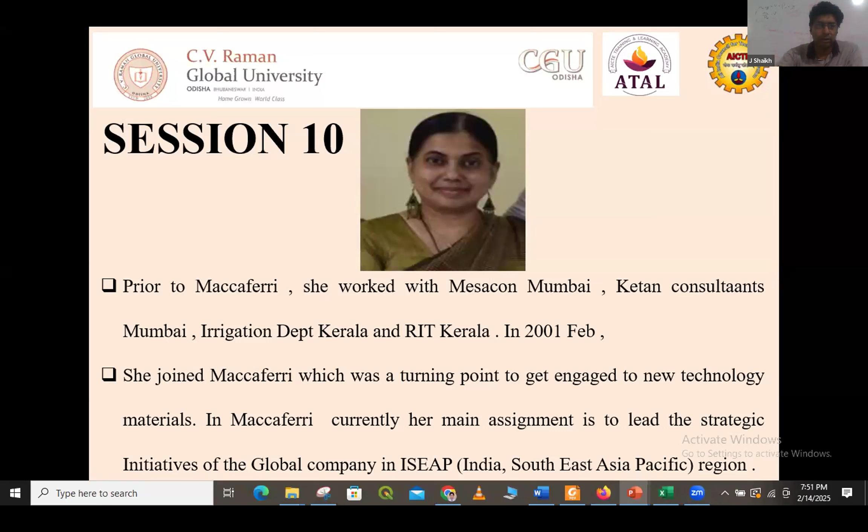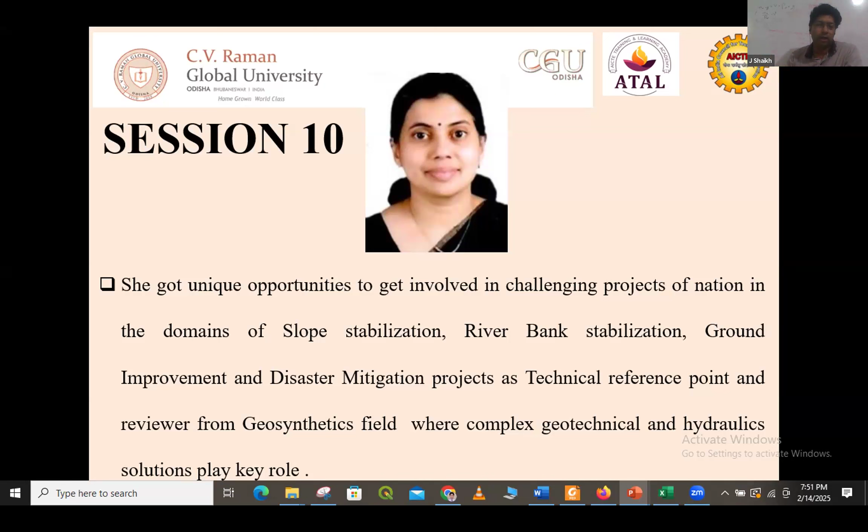She got unique opportunities to get involved in challenging national projects in domains of slope stabilization, river bank stabilization, ground improvement, and disaster mitigation projects, serving as technical reference point and reviewer in the geosynthetics field, where complex geotechnical and hydraulic solutions play a key role.

Ms. Minimol Korulla is instrumental in developing new products and engineering systems, assessing the techno-commercial benefits of such innovative systems in real application areas. Her focus is to use local materials optimally in construction, emphasizing eco-friendliness and carbon footprint reduction. She has received many national and international awards for her contribution to innovation, sustainability, and disaster mitigation. Here you can see Professor Deepankar Choudhury of IIT Mumbai presenting her with an award.

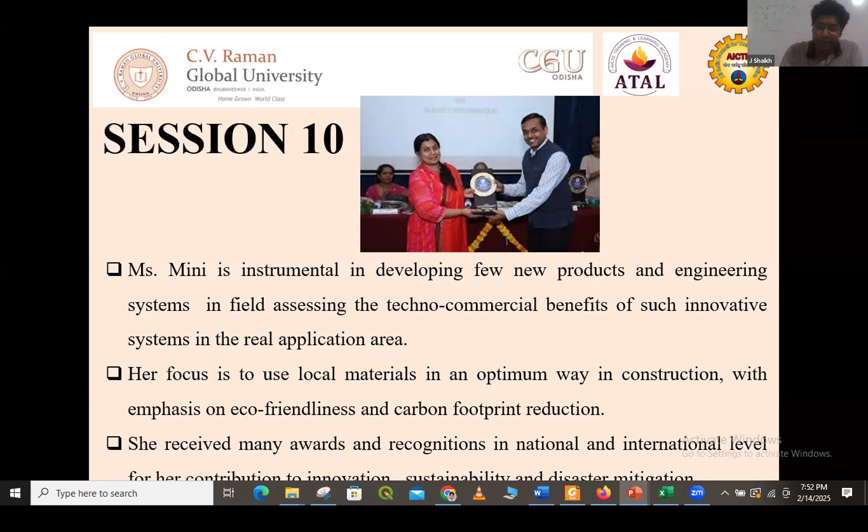Hello, ma'am, are you there? Hello, it's not visible. Thank you, am I audible? Yes, you are audible, ma'am. Can you say, which award did you get in this picture? I'm really impressed how beautifully you presented. Okay, I'm just, but I'm not finished. Oh my God.

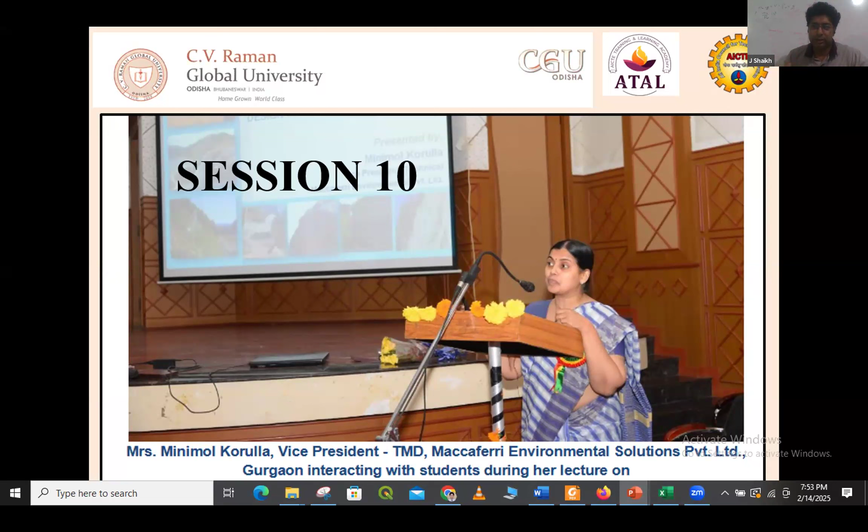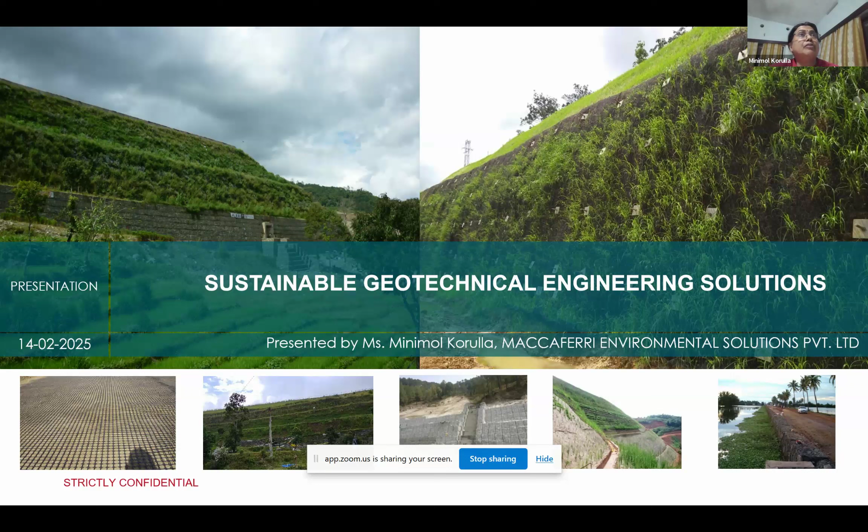The topic, sustainable geotechnical engineering solutions, is very close to my heart. This is why I have been in my present organization for a longer period compared to all other organizations I worked in. I was teaching in an engineering college, worked in the Kerala irrigation department, and worked with some structural design firms. But at Maccaferri I am spending a lot of time, one reason being the freedom to work for sustainability and eco-friendly solutions. The second reason is these platforms, where two-way learning happens, and we can think together how to make the world more sustainable and eco-friendly for our future generations.

So the flow of the presentation is: some introduction, then ground improvement. We were listening to Professor Sivakumar Babu's application of many polymeric materials in landfill, soil reinforcement, and he mentioned ground improvement also. But specifically, I want to emphasize ground improvement, how these geosynthetics and related materials can play a role in coastal roads, marshy areas, and filled up land.

Pavement applications - this is a huge application area. The last 5 years, it is really going in a very fantastic way, I will say. One reason is a code or guideline published by IRC, IRC SP 59. It is for pavement applications for cost effectiveness and durability.

Then slope stability. Slope stability is an area where definitely the geosynthetics alone may not work. It may have to combine with other types of materials also, but still it can play a big part. So here I will be introducing, apart from the geosynthetics, other geotechnical related materials like steel meshes, steel ropes, energy absorption panels, and bioengineering materials like coir, jute, and mixed type of products.

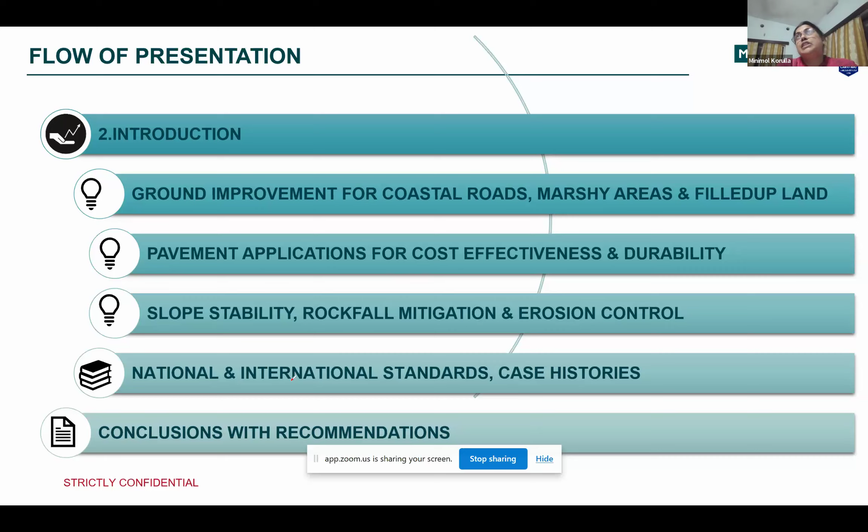And apart from the Bureau of Indian Standards and the IRC, we are following a number of ISO standards. India is a participating member of some of the ISO committees, and those guidelines which we can use without any inhibition - I just want to give a glimpse on that, and some recommendations for general civil engineers.

I'm sure that as the topic of this series of sessions is sustainability, this must have already been discussed. But the question is, when we are doing day-to-day design, are we considering the conditions of today or future? So definitely it should be future.

In some branches of civil engineering, few branches, we always go for predicted volumes, maybe in hydraulics, maybe in highways, but not everywhere. And we are not really thinking about the decaying of environment and the increase of population, the increase of waste volume, and recently everyone is talking about climate change. Even a fifth standard student will talk about that. But are we using it when we are going into our regular designs? And what is going to be the condition - whether it will be better than today or worse?

It may be that in first class cities, the main areas maybe near the capital city, may be good and clean, but we know that many parts of even our main cities are not in good shape, and it is getting deteriorated. I was in Delhi for so many years, and definitely it was a big concern whenever we were traveling to see how the atmosphere is getting polluted, how the water is getting polluted, how the land is getting polluted.

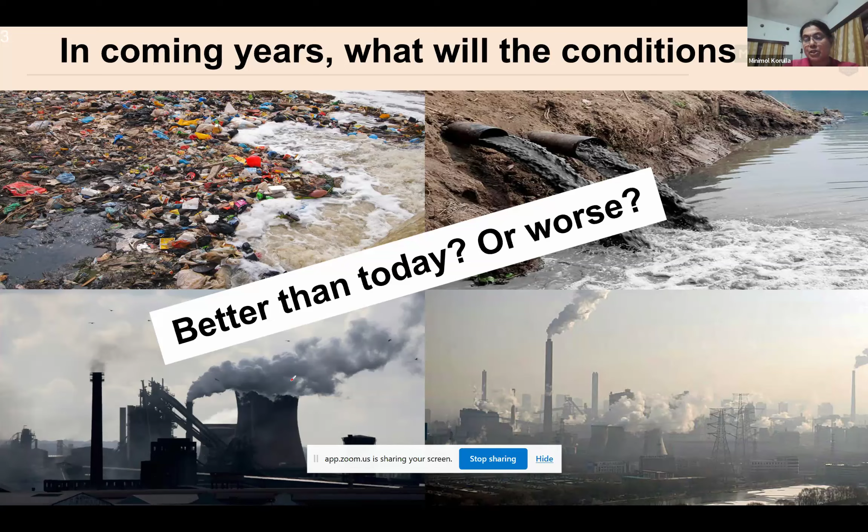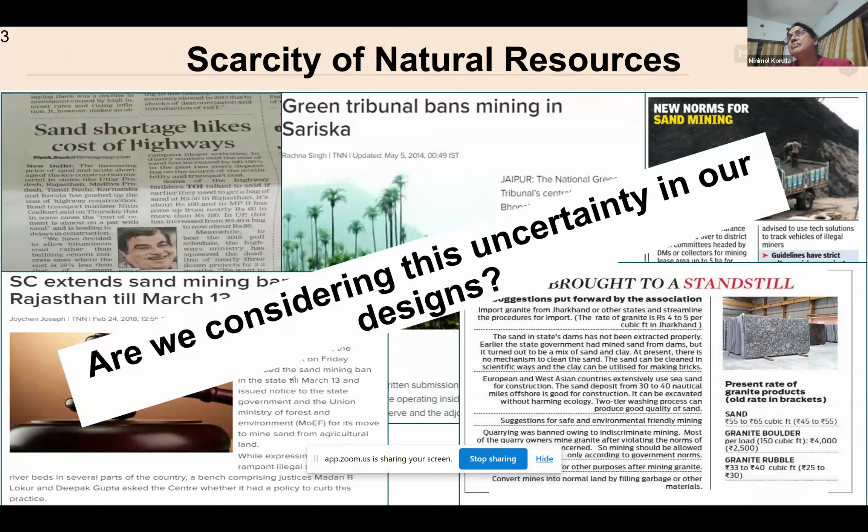And the next issue is the scarcity of natural resources. In many states in India nowadays, our design guidelines tell us we have to use frictional free draining sand, with the classic assumptions: cohesion equal to 0, angle of internal friction equal to 30 degrees or more. But that is not now available in many parts of India. In many states, sand mining is completely banned.

But are we preparing our next generation for what material they are going to construct with, using the same books, same syllabus, with only small modifications? Are we making them prepared? Especially in a country like India, where we cannot jump to something so fast because of the economic diversity, the mixture of culture, and the developed stage. So this is a very big topic, and I don't think my humble session can cover even a part of it.

But still, where I want to touch on: one is the frequent natural disasters — earthquakes, landslides, tsunamis, floods. Every year we are hearing some very bad calamity happening in some part of India. So I am from Kerala. Last year, July 30th, a very big landslide happened in Wayanad, a part of Kerala.

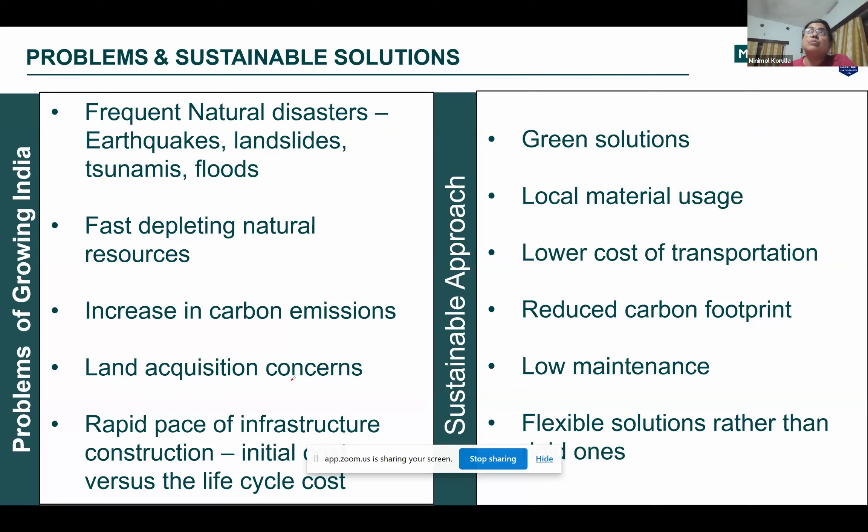And as far as possible, go for flexible solutions. Why flexible solutions? Especially in a place where a lot of disasters can happen, instead of rigid solutions, flexible solutions can accommodate a lot of movement. Using flexible solutions, in many places we can reduce the requirement of reinforcement, ground improvement, and too much excavation — we will be able to minimize it.

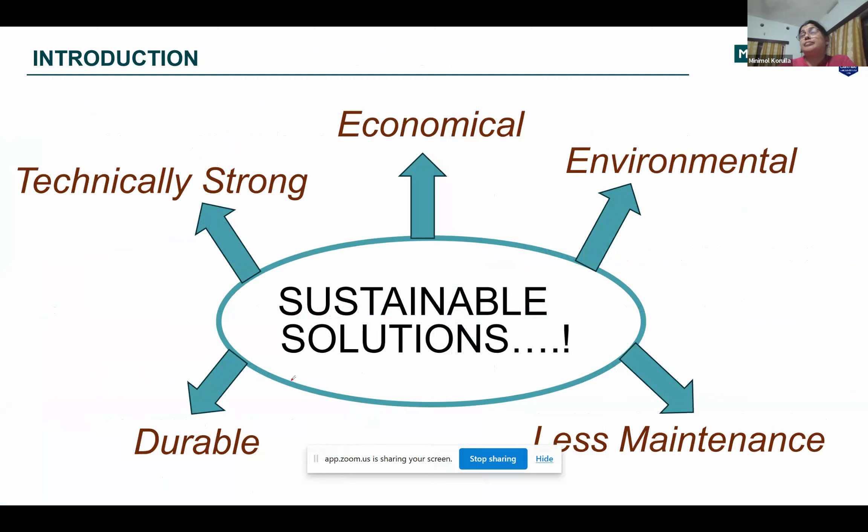So when we talk about sustainable solutions, it's not just about green solutions. It should be technically strong. It should be economical — definitely very important, then only it will get repeated. It should be environmental friendly. It should have less maintenance, and finally it should be durable.

So talking about different application areas, as a continuation of Dr. Babu's presentation, about flexible type materials — one major family is the polymeric family, with a lot of family members. Initially it was mainly geomembrane and geotextile; 20 to 25 years before in India, those were the main materials we were talking about.

But now they brought all their other relatives also, cousins, aunties, uncles, grandchildren, everyone has come to India. A geosynthetic baby is getting born every day in some part of the globe because the use is increasing, and more manufacturers are entering the field, making differentiated products to create new brands.

If you classify the major applications for polymeric materials or other flexible materials, like bioengineering materials such as coir or jute, or rockfall protection meshes or rockfall barriers, basically these cover ground improvement, pavement stabilization, subgrade stabilization, slope protection and slope stabilization, simple to complex erosion control measures, rockfall mitigation measures, and drainage solutions. In each of these applications, a number of product families exist.

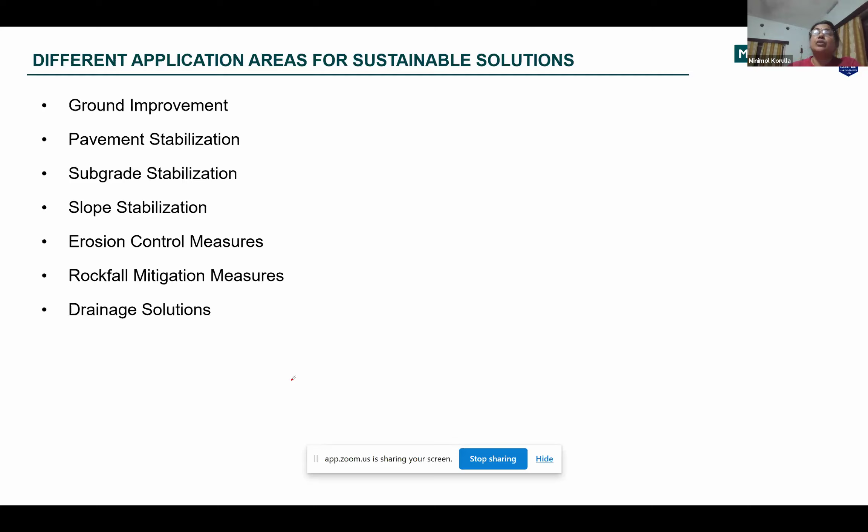And these are covered in our Indian guidelines also. So definitely this type of alternate technology, as well as the system and its specifications, should be part of the academic curriculum also.

Now starting with ground improvement - coastal roads, marshy areas, and filled up land. I've seen Dr. Babu has already covered the PVDs, as well as other ground improvement methods. So I'm basically talking about basal reinforcement, where geogrid can be used as a shallow ground improvement method, and it can be combined with PVDs wherever clay is the main foundation material, or it can be combined with stone columns also.

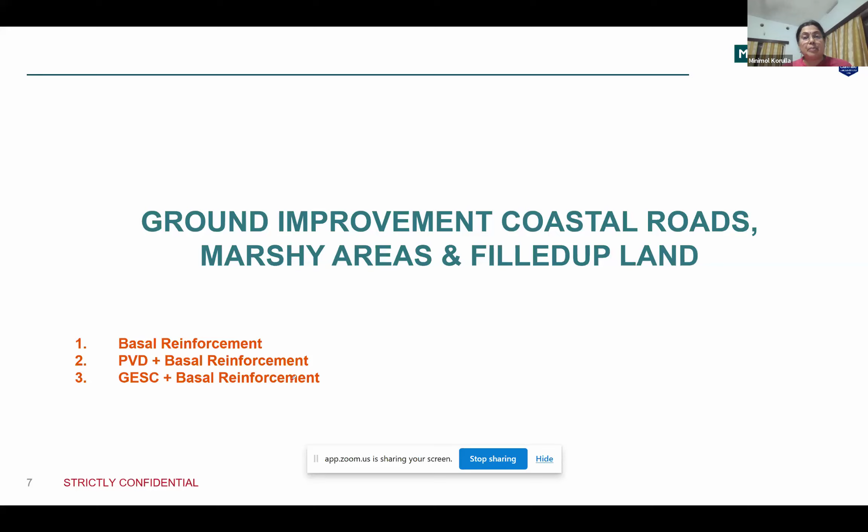So basal reinforcement, basal reinforcement plus PVD, basal reinforcement plus stone column - not simple stone column, but geosynthetic encased stone column. These are the three points I want to cover in the next few slides.

So basal reinforcement - I will say this is a very wonderful material where the geogrid can be used like a raft in structural engineering when giving the foundation. The objective of giving a raft is to control or stop the differential settlement.

Why? Because in the raft, there will be a complete redistribution we are assuming, and we design the structure like that. So if we use a geosynthetic - not any geosynthetic, but one with reasonably good tensile strength, and more importantly, high stiffness - then it can act like a raft, so that whatever load is coming gets redistributed, and the settlements, especially the differential settlements, get regulated.

If we have to really understand how the inclusion of this geogrid will modify the behavior, we may have to do a numerical analysis. But even with normal calculations for bearing capacity, we can take advantage of using a geosynthetic.

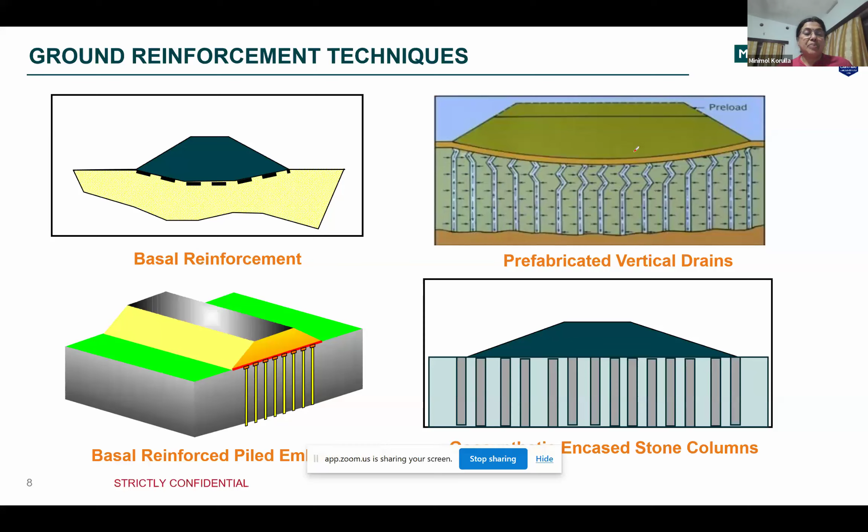So we can go for PVDs, prefabricated vertical drains, which will accelerate the consolidation. PVD can also be called a geocomposite. The PVD will accelerate consolidation by reducing the drainage path, and the basal reinforcement will help uniform distribution of forces and control differential settlement. The same can be combined with piled embankments as well as with geosynthetic encased stone columns.

So prefabricated vertical drains, basically when we are using the PVD, how much time can we wait? That is until the end of consolidation. Maybe it's only 45 days we can wait, or maybe something like 6 months we can wait. So that will decide the PVD spacing as well as the diameter of the PVD.

But how much height we can construct in one stretch will depend on the shear strength of the soil. But when we are putting a basal reinforcement, at a stretch we can go for more block heights for the embankment construction.

So someone who is executing the structures or the work in the field can understand how significant it is when we are allowing a stage construction with permission to go for higher block heights. That will be a big advantage, a big cost reduction for the constructor, the contractor, or the end client.

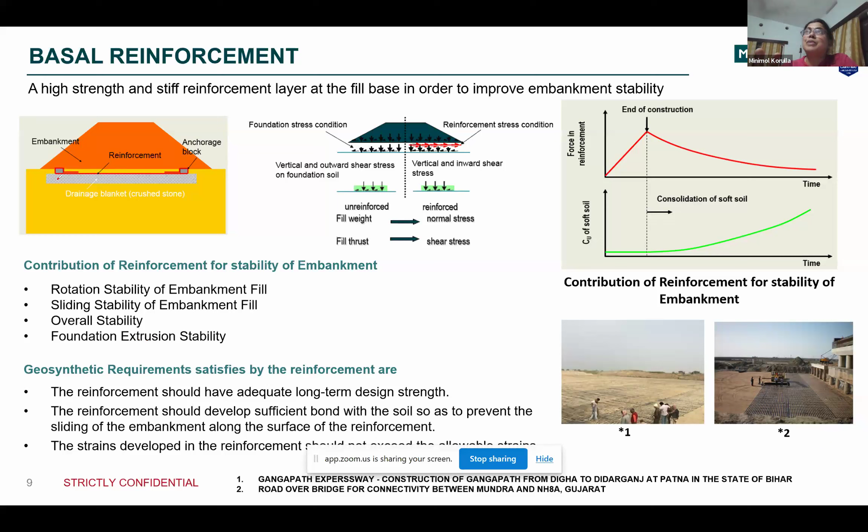So definitely I cannot cover all these failure mechanisms. If you are interested, one can go to IRC 113. It is a very thin book, and it talks in a very simple way. Somebody who knows earth pressure theories will understand the equations, and even worked out examples and a number of case studies are explained in this particular code.

Now about the PVD. As I told you, PVD itself is a geocomposite. It will be a combination of a filter jacket and a core. The filter jacket is made of geotextile or geofabric, and the core is made of a stiff material. What is the function of the filter jacket? The function of the filter jacket is the same as any filter: it will prevent soil particles from entering the core, and it will allow the movement of water.

Whereas what is the function of the core? First of all, the core will support the filter jacket because it is a fabric. If you are putting it in soil, for it to stand, support is required. So this core supports the filter jacket. Second, it provides the internal flow of water along the drain. And finally, it provides resistance to the longitudinal stretching as well as the buckling of the drain.

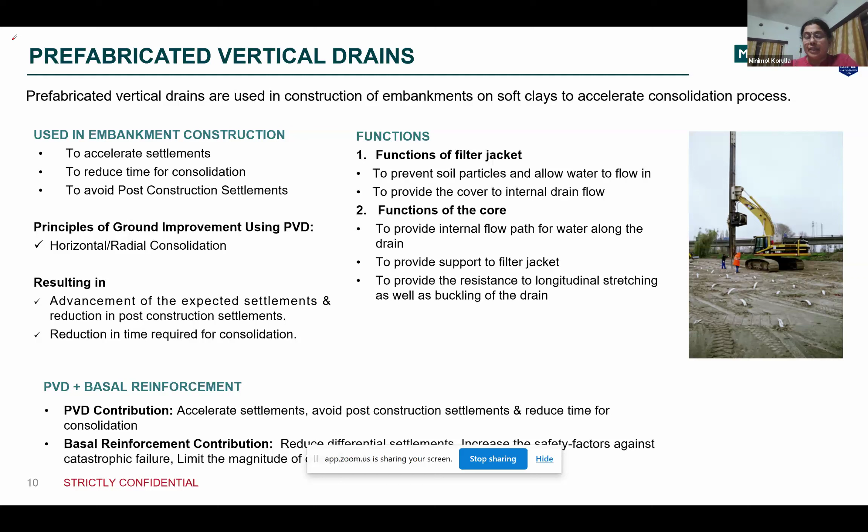So this is a project which I was part of the design team for, and even during the implementation time, the project was monitored as part of the expert committee. So I know the project well.

But overall, all these clays have very poor bearing capacity, and additionally the settlement characteristics are really very dominant. If we directly place an embankment of height, say 8 to 10 meters, on this type of clay, it will settle like 1.5 to 2 meters.

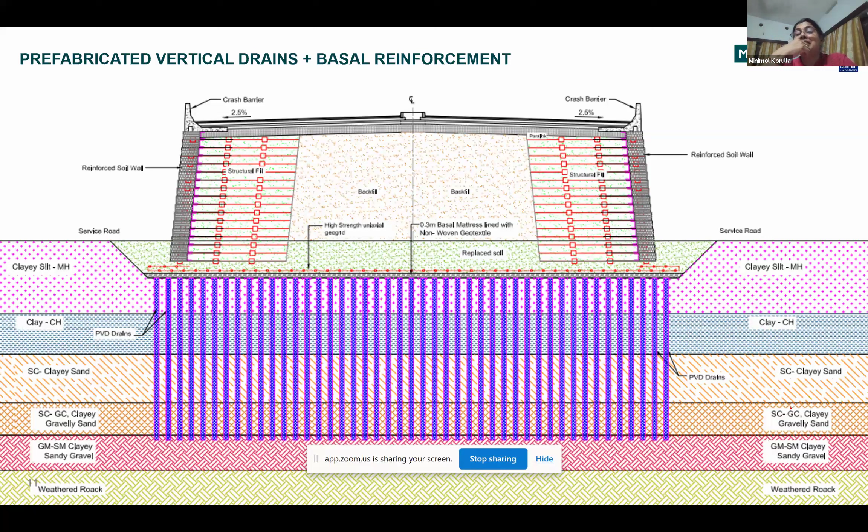And especially the cross section we are seeing here is for a bridge approach. So if we allow 1 to 1.5 meter settlement, you can imagine that to reach the bridge we may have to provide some sort of ladder, right? And for the vehicles there will be a lot of problem.

So for this project there were two suggestions. One was with PVD and basal reinforcement, and the other suggestion was with stone columns, not regular stone columns but, as I mentioned earlier, geosynthetic encased stone columns.

I'm sure at least a few of the participants must have heard and maybe have some familiarity with the geosynthetic encased stone column. So what is it? As I mentioned, in this particular area the clay was very poor - its phi value was almost zero and C value was only 10 to 15 kPa.

So in such a place, if we drive a stone column, what will happen? The clay will slowly infiltrate into the stone mass, and finally the behavior will be like clay only. But if you put a filtering geotextile, then that can act as a deterrent for the clay particles to deteriorate the soil mass. That is the function of the geosynthetic encasement.

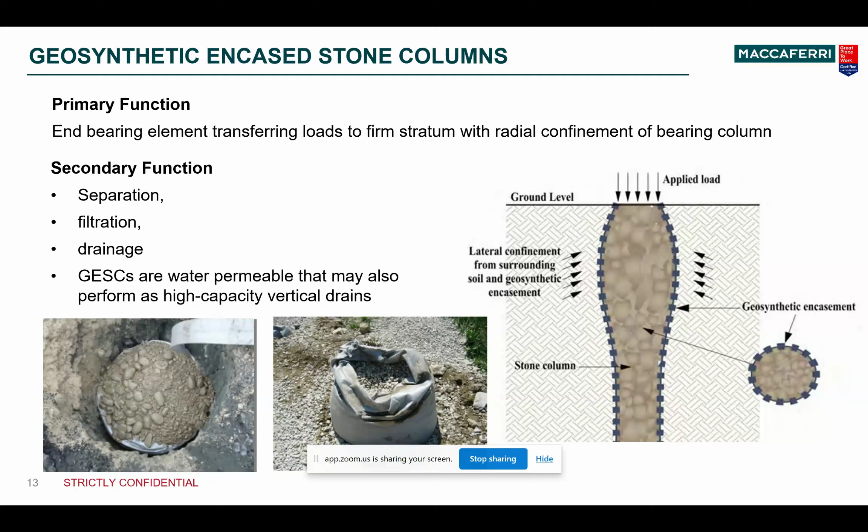So on the same stretch, in some areas, as I told you, it was PVD plus basal reinforcement, but in some stretches PVD alone would not work, and in those areas stone column and basal reinforcement combination were used.

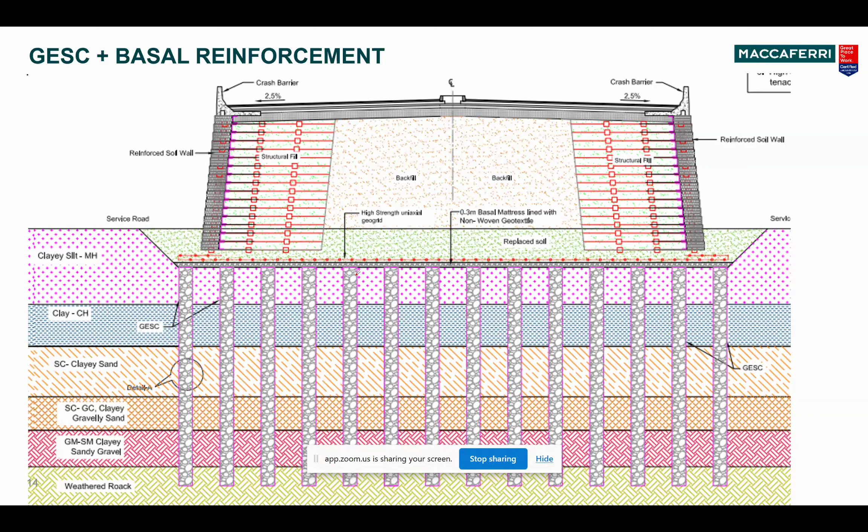But in both cases, basal reinforcement played a big part, because if basal reinforcement was not used, the overall cost of that some 20 kilometer stretch just for ground improvement would have gone to something like 200 crore. But with the introduction of basal reinforcement, that came down to between 25 crore to 40 crore. I don't know the exact final figure.

When the solution and installation methodology was finalized, it was 25 crore. But later the contractor told me that some increase happened because of delays and so on, so I guess it may be another 30%. But he also admitted to me that overall the initial 200 crore got reduced to 40 crore.

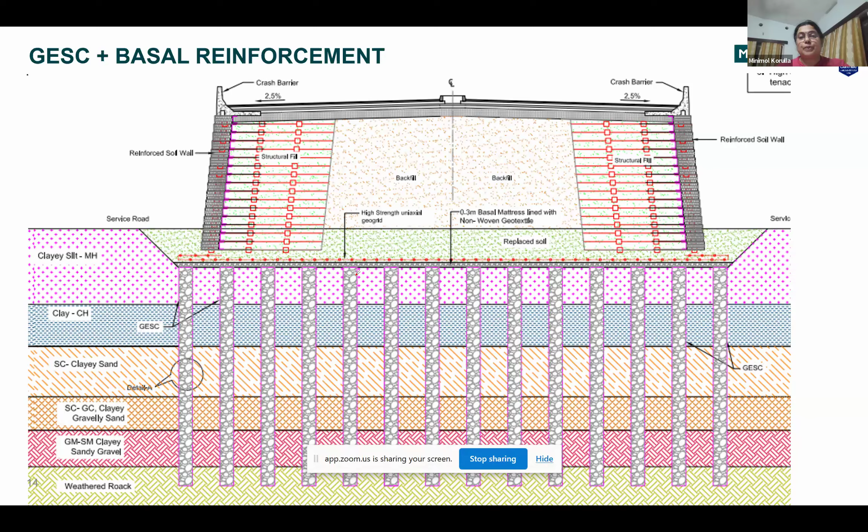Now let me touch on the pavement applications. The first is the geotextile, especially when we are constructing a road embankment over very poor soil. If we keep a separator layer or a filter layer, then the contaminated area will not damage the pavement layers.

Second is the geogrid. I was talking about the basal reinforcement, and I said it should have good strength, good tensile strength, and good stiffness. So you may ask what is the range? When I talk about good tensile strength, I mean something more than 100 kilonewton per meter, and stiffness more than 1000 kilonewton per meter.

But in pavement, we don't require those types of geogrids which have more than 100 and all - we can go for even 40 kilonewton per meter or 25 kilonewton per meter. But these types of geogrids should possess some specific qualities so that the pavement layers will be stable under traffic load.

Because pavement layers are very near to the wheel loads, and under the wheel loads, the base component or sub-base component should not slip off. So the geogrid should act as something which increases the stability. Usually extruded geogrids are used for this purpose.

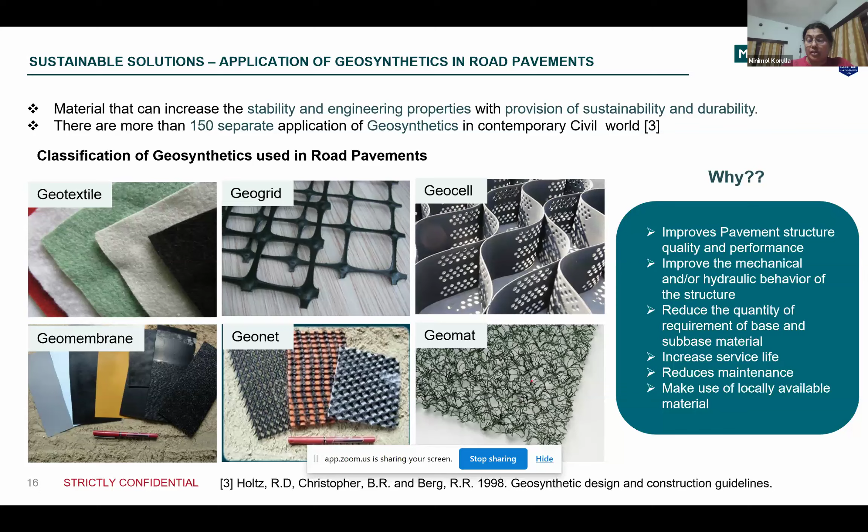So for pavements, as I mentioned, there are different families of geogrids: knitted geogrids, woven geogrids, bonded geogrids. Among them, extruded geogrids are considered one of the best for pavement stabilization.

Usually extruded geogrid, biaxial geogrid, or even multi-axial geogrids can be used. But in India at the moment, the biaxial geogrid is the most popular. Its basic polymeric material is polypropylene, and it exhibits high modulus and high tensile strength. One more important terminology in pavement application is junction strength and junction efficiency. That is also very good for extruded geogrids, and hence extruded geogrids are the best for pavement applications.

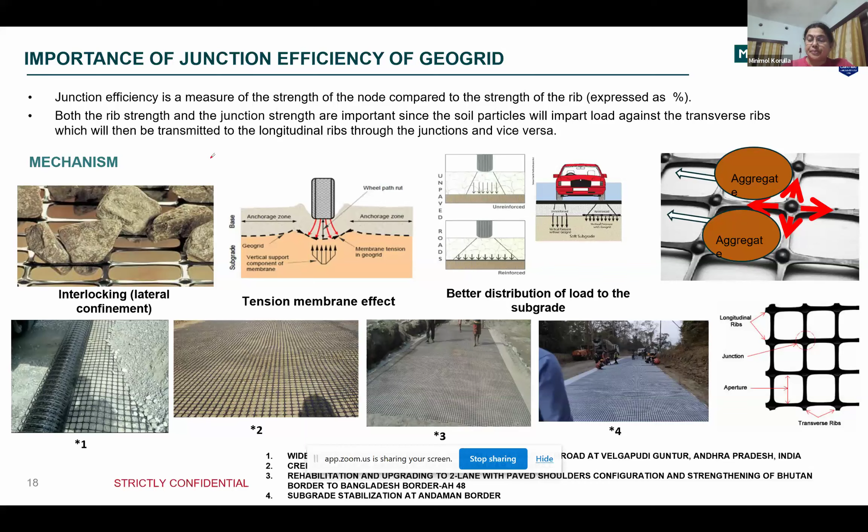So, apart from base reinforcement or sub-base reinforcement, even bituminous layers can be reinforced, or the application of geosynthetics can increase its quality. Like paving fabric, it's a geotextile which can be used in asphaltic layers. It can act as a good moisture barrier layer, helping prevent water intrusion and hence pavement deterioration.

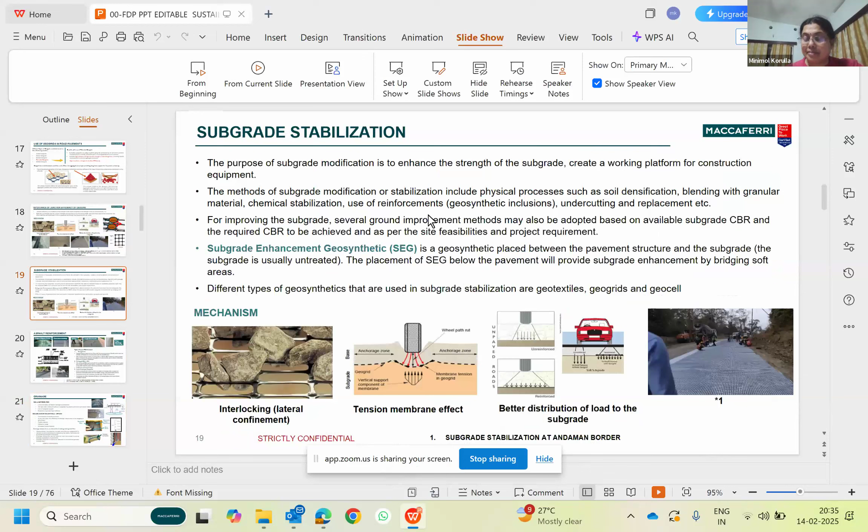So I was talking about extruded geogrids for pavement stabilization and reinforcement. The extruded geogrid is the best because of its efficiency, junction efficiency. Under wheel loads, it will not allow the aggregates to move, and it will control and absorb the strains. Because of this, the maintenance time in a pavement increases drastically.

For example, if a 20-year design period is given to a designer for a pavement, usually he will define maintenance after every 4 years, especially for state highways or major district roads. He'll say every 4 years I need maintenance. But someone designing with geosynthetics can really tell, if he has real experience, that for 20 years he doesn't require any maintenance. Someone conservative will say maintenance may be required after 9 years, meaning only in the 10th year.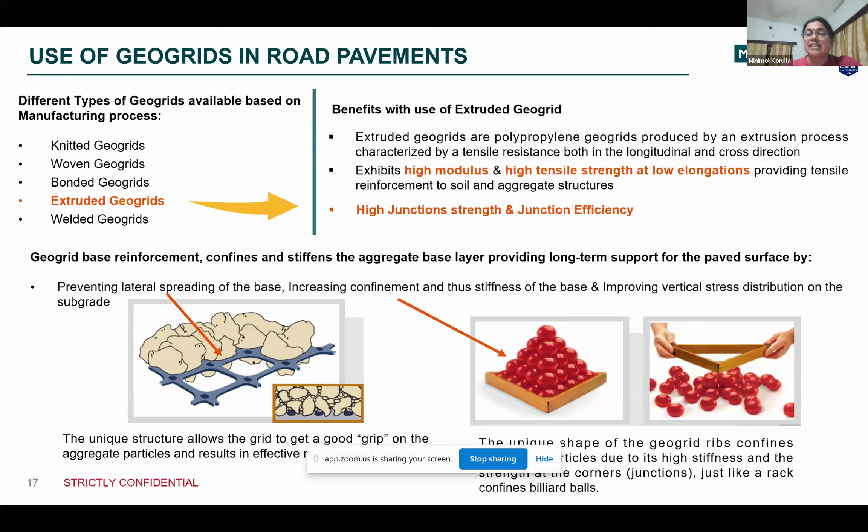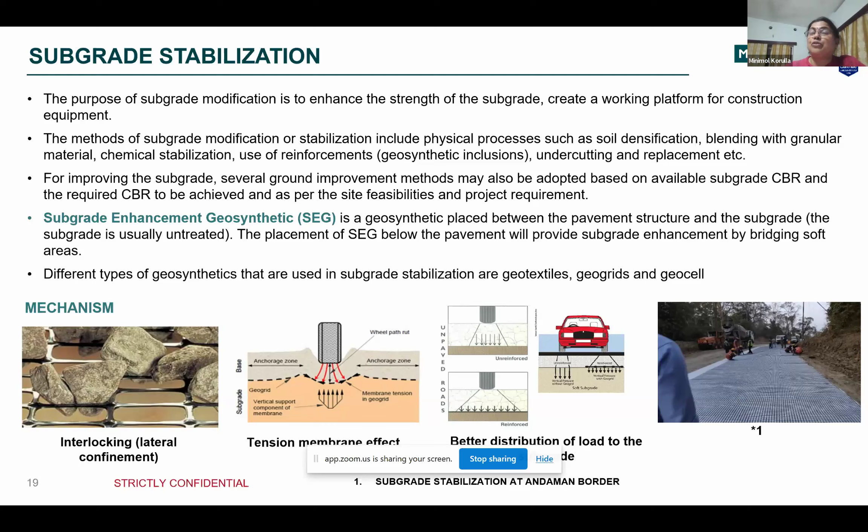I won't be able to explain everything, but definitely I will recommend, for somebody who wants to know more about the application of geosynthetics in pavement layers, IRC SP59, and IRC 113 for basal reinforcement. For both these codes, if you have any doubt, you can ask me, because I was the subgroup chairperson for both these codes for the authoring subgroup.

So now, apart from base reinforcement, even the asphaltic layers - because base and sub-base are basically aggregates - but what is the most expensive material in a bituminous pavement? The asphaltic layers, right? So even the asphaltic layer thickness can be reduced and durability increased if we select the appropriate geosynthetics.

Paving fabric is a textile material, a non-woven textile material, which can act as moisture retention and provide separator property to the asphaltic layers. And paving grid, or glass grid, made of glass fibers, can increase the strength of the asphaltic layers and act as an overall stiffening layer.

Then there is the composite, AIC - asphalt interlayer composite. It is a combination of glass grid plus paving fabric. So you can assume what the function will be - it will do the combined function. It will increase the strength, and at the same time act as a moisture retention composite also.

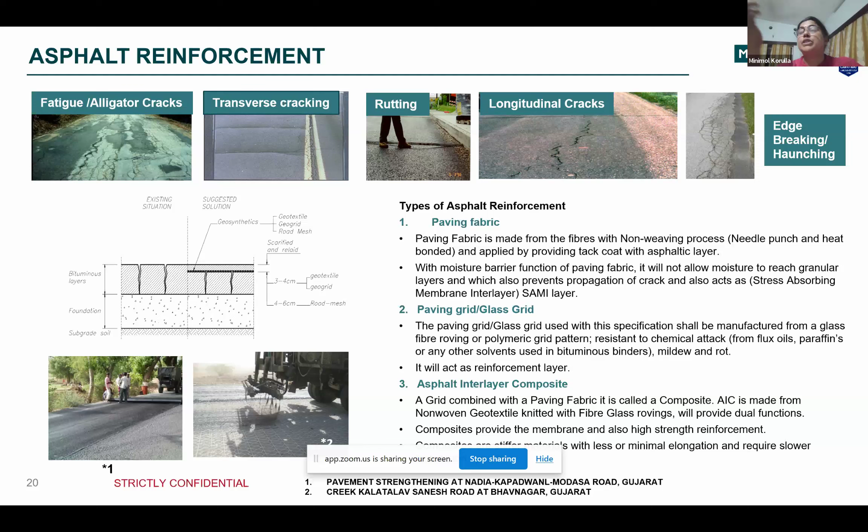Now, one more family member that gives a lot of value to the sustainability concept is drainage composite. I remember when I used to go to CRRI, maybe 10 years before, they used to hear about drainage composite, because I used to explain how it can replace 600 gravel thickness. Usually, behind a retaining wall, we have to give gravel filter, gravel drain, 60 centimeters.

Which requires a big space and a lot of aggregates. But as the alternative, I'm talking about a polymer composite. 10 years before, it had to be imported from Brazil or Malaysia or other countries. So after hearing me, my friends in CRRI used to say, okay fine madam, very good, it's all good, but it's good for academic purposes. We will go with natural aggregates, since they are still available and cheaper in India.

But in the last 5 years the situation has completely changed. This is a very hot product because the cost of aggregates has shot up. Good aggregates we are not getting. So even if the contractor brings aggregate, once we do the quality test, if it doesn't have the quality, it has to be rejected.

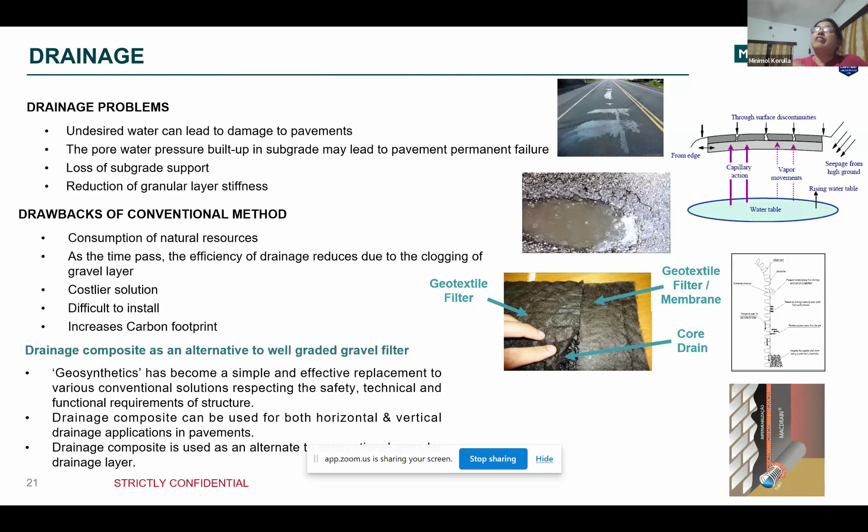Erosion control can be done best by bringing vegetation. But whether vegetation can come in every slope is the question. Vegetation may not come in every slope, especially when the slope angle is more than say 60 degrees. Up to that, in some parts of India it is easy, like the northeastern states, Arunachal, Assam, maybe in Karnataka, Konkan area, Kerala - these places it can come easily. But in many other states, it may not be easy.

But even in some of the Himalayan states where a lot of greenery is there, for example Himachal Pradesh, we were doing a national highway project. It was seen that the slopes had to be made near 60 degrees. It's a good soil with cohesion and friction, so it can stand at 60 degrees. But the way we expected, the vegetation didn't come.

So then the question arose: what can be done? We civil engineers thought bringing vegetation is so easy - if you are especially in a place where rainfall is quite strong, it will be easy. That was our concept. But we learned that the soil's agronomical factors have to be checked, especially the pH, acidity, alkalinity, as well as different elements like sodium, potassium - whatever it is, it should have the correct proportion. Then only will a slope make vegetation come easily and fast. And especially when cutting a slope in a steeper way, this requirement becomes more stringent.

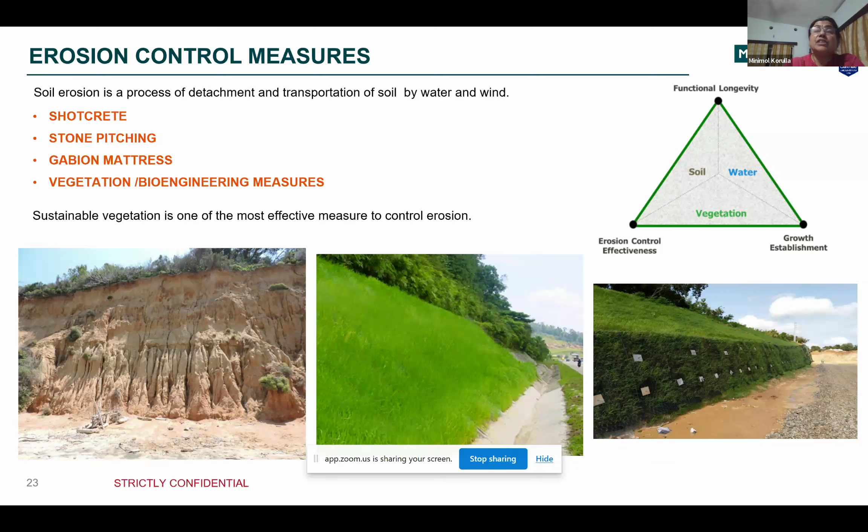So then how can we take the help of geotextile materials? Whenever the slope is less than 45 degrees, we can go with coir or jute itself. But when the slope is between 45 to 55, we may have to go with some material having mats with some tensile strength. And if it is more than 55 to 65, the tensile strength may have to be more than 10. And if it is more than 65, maybe with some cohesion the slope may be standing. But if the erosion needs to be stopped, the erosion control mat itself has to have a strength of more than 35 kilonewton per meter.

And then it should have a component which facilitates the growth of vegetation. Finally, the installation should be contractor friendly, otherwise the contractor is not going to adopt it. For that, drapability has to be good. Like coir and jute - especially for jute, the drapability is very good, whereas its tensile strength is not so good. So in many cases, we can combine bioengineering materials like coir and jute plus the polymeric material which has the tensile strength also.

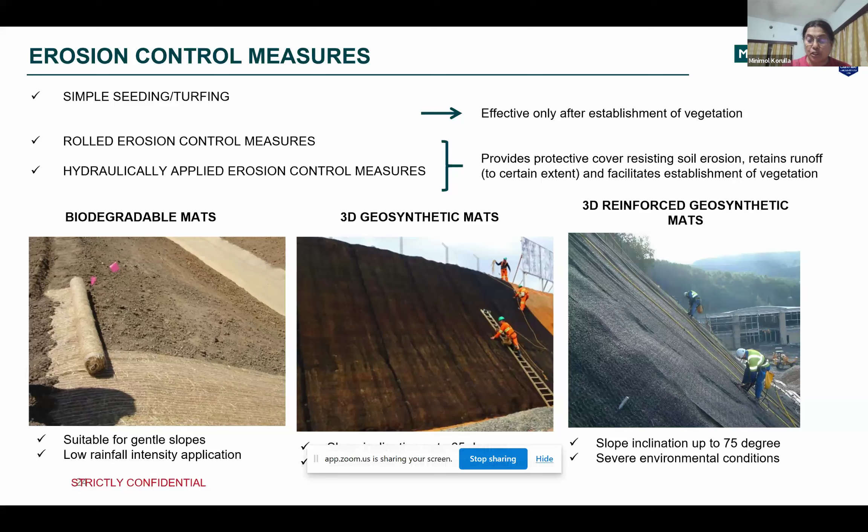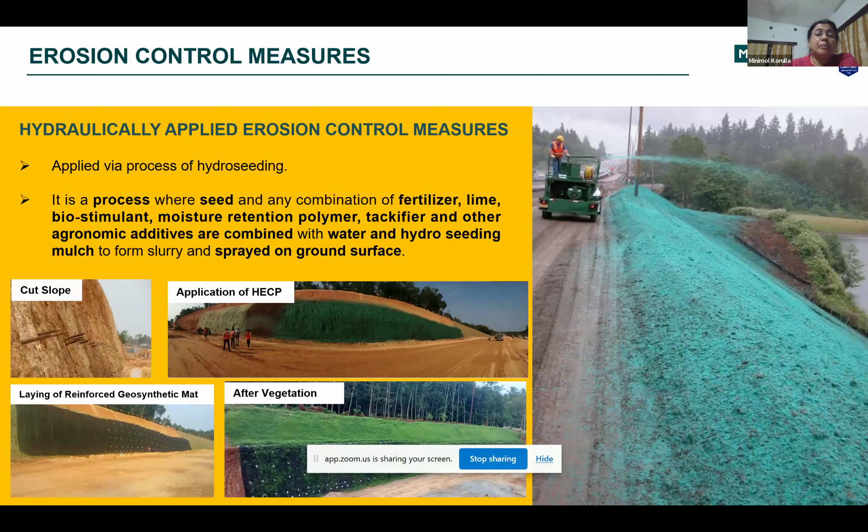And in some cases, after doing all this erosion control measures and all, still the vegetation may not come. In that case, one may have to go for HECP - hydraulically applied erosion control product, like hydroseeding. Here, the seed will be sprayed with a combination of fertilizer, lime, biostimulant, moisture retention polymer, and other elements which can make the soil fertile and the vegetation can come quickly.

Now in slope stabilization, apart from erosion control, we have heard about reinforcement, especially from Shivkumar sir's presentation. So we may have to combine in many places the reinforcement, erosion control, and nailing techniques.

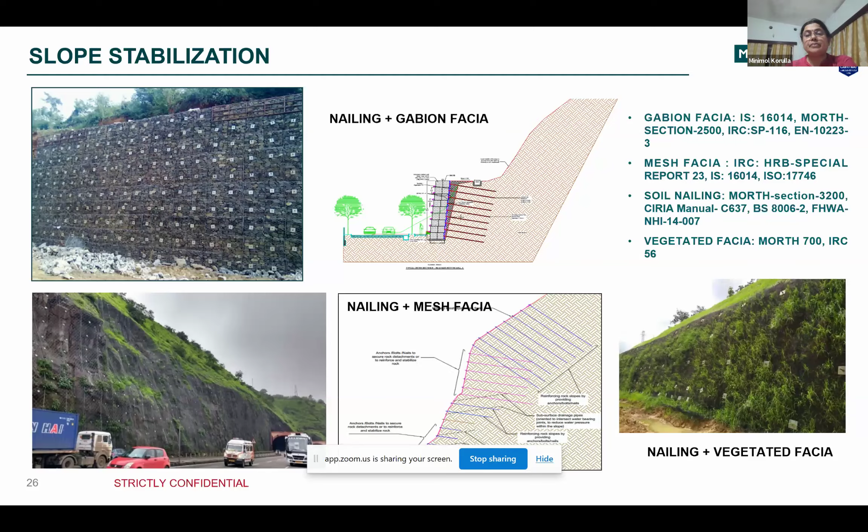Gabions are steel wire mesh boxes which can be filled with stones, used as gravity structures or as the fascia of reinforced soil structures, but also as simple gravity structures. What are the benefits? Because they are just wire mesh filled with stones, they are completely free draining. The 30 to 40 percent of voids mean the weight will be 30% less than a random rubble masonry work. Because of the free draining property, pore pressures will not be there.

This woven steel wire mesh is a flexible material, so we don't have to worry about settlement, because for flexible structures the code permits a high level of settlement, up to 300mm. The structure will not get affected at all. So the flexibility, the free draining property, and the density reduction all contribute to the eco-friendly nature as well as the cost effectiveness of gabion structures.

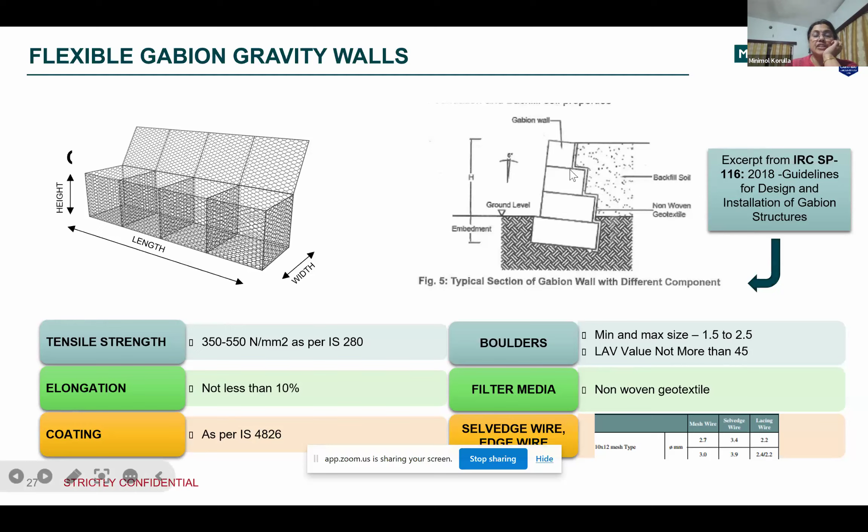Another advantage is that nowadays mechanically woven gabions are mostly in use, and that is supported by the Indian codes. These gabions can be connected with each other using lacing wire. You can lace in a pattern as the codes specify, and once done, it becomes a complete monolithic structure, and it will be flexible. It can really elongate up to about 10 percent.

It's permeable, so pore pressures will not be there, so the design can be more optimized, and it can be constructed in a very simple way. Like in the Mumbai Pune Expressway, whatever tunnel muck came from the tunnel construction and hill cutting, the same stones were used. You don't have to dress it, you don't have to prepare mortar or anything. You can use even unskilled and semi-skilled laborers to make it, and those structures are durable.

If a properly designed structure is constructed properly, then the gabion structure will stand. Even the first mechanically woven gabion structure, placed 140 years ago near a river called Reno, is still standing. I have seen it, it's intact. And big tree roots, if growing through a normal stone masonry or concrete structure, would cause a lot of cracks. But for a gabion structure, it will reinforce it and become more strong.

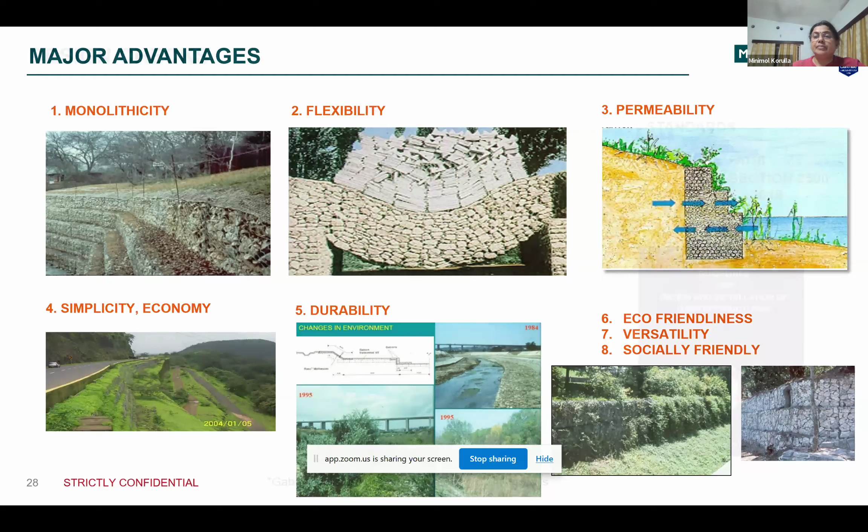Reinforced soil structures have already been covered by Shivkumar Babu sir, but I just want to add, especially in hill roads where I work a lot, the advantage of going with reinforced soil structures is the flexibility and redistribution of forces. But one major difference when going for a reinforced soil structure in an urban area versus a hill road is that in urban areas we usually go with concrete panels or concrete segmental blocks. But in a hilly area, using a concrete panel or segmental block becomes very difficult to install.

So in those types of places, we can go with either the gabion fascia, like in this case, with steel mesh and stones, or vegetated fascia with simple wrapping of steel mesh or geogrid, and geomat or coir mat inserted so vegetation can be grown. But the major element is the reinforcement. Whatever is going across the structure is called main reinforcement, and there can be supplementary secondary reinforcement which prevents bulging of the fascia.

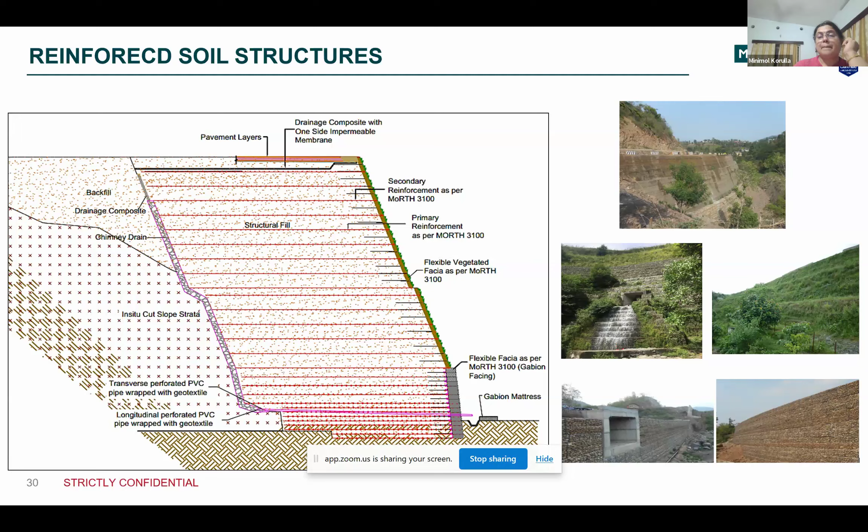So skipping a bit, the last portion I want to talk about is rockfall protection. I mentioned the Mumbai-Pune Expressway where meshes protect against rockfall. But there are situations where we cannot cover an entire rock surface or hill with meshes, like in the Himalayan hills which may have kilometers of height. There we cannot do complete mesh covering.

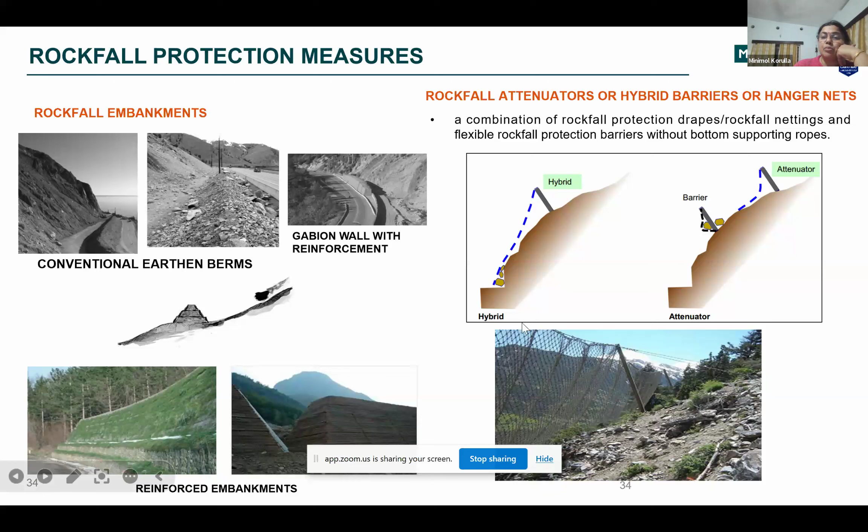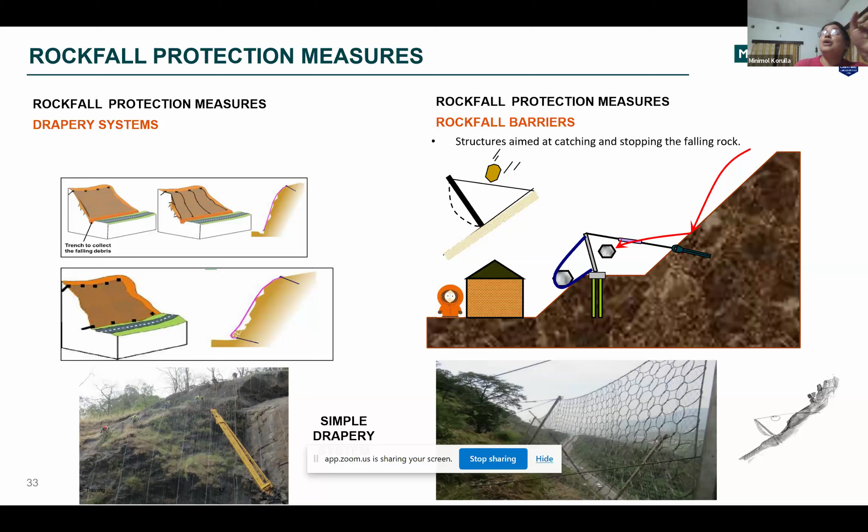There we go for barriers. This is one type, in fact a hybrid barrier. Simple barriers can also be there, but all these are designed with principles of mechanics. We calculate the potential energy of the falling rock and the kinetic energy, and determine the energy absorption capacity the barrier needs. For all this, calculations exist, and nowadays good software is available. As someone continuously working with IRC, ISO, and BIS, I can say we do have Indian codes also.

So I am skipping to the last one in the series: the umbrella structure. Currently I am working on a project in Assam, and suddenly the cut slope—because they cut the slopes in a very unengineered way, all the civil engineers witnessed it—was done because the DPR consultant designed it without seeing the site. Once the slopes were cut, landslides started.

In those types of places it's even risky to go near. So how can you erect protection very quickly? This is a system that helps create an emergency protection system, combining a fascia and a nail together. Like an umbrella, you just open it, place it, and fill soil behind it, and that becomes a system. The same is used for mitigating avalanches near places like Kedarnath.

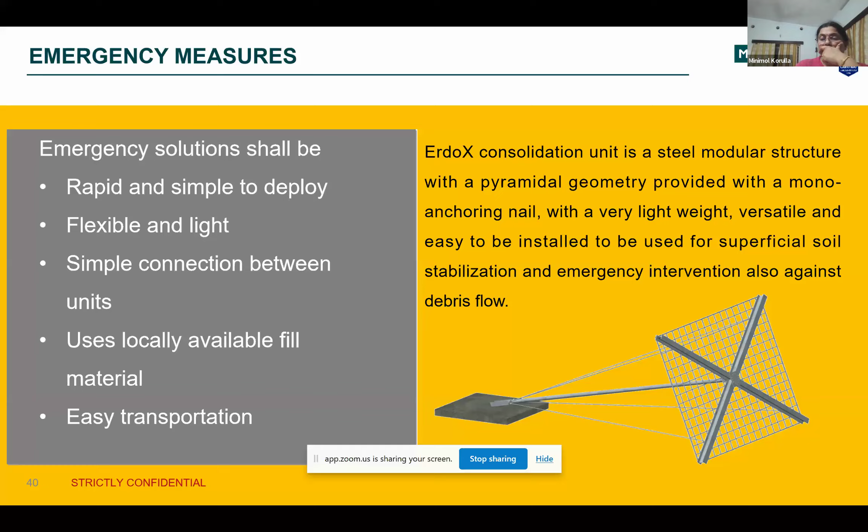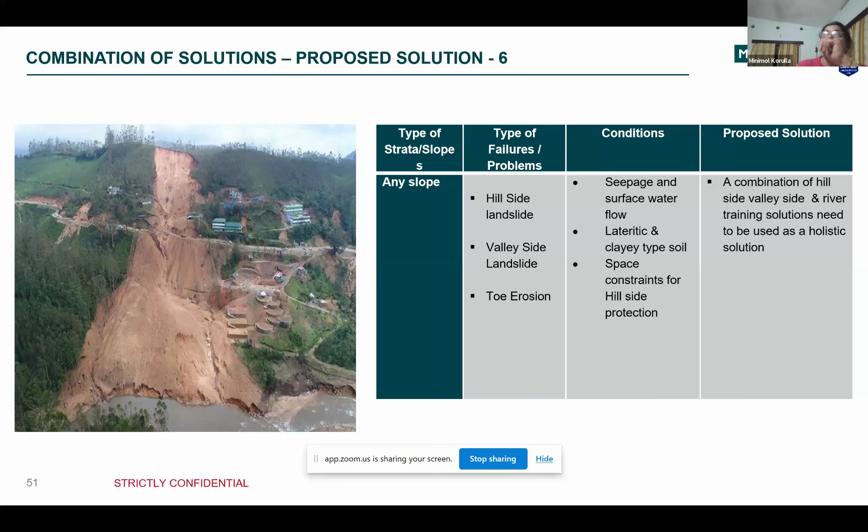So skipping some slides—barrier details, channel barriers. If you want to know more about rockfall mitigation measures and barriers, the drapery systems, one can refer to HRB 23, a state of the art report. Now IRC has decided to make it into a guideline, so we are working on that. But HRB 23 is good enough for beginners to understand the criteria, the testing, how to select, how it can be designed, and how it can be optimized.

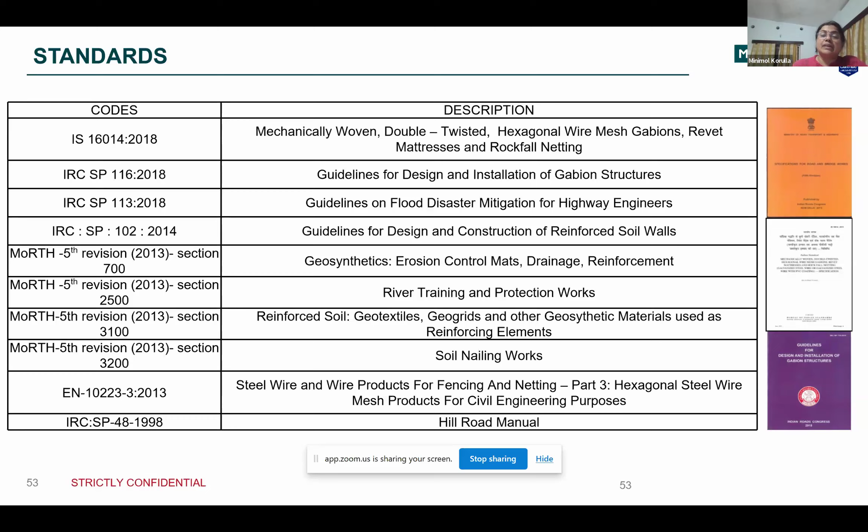The standards we discussed here: IS 16014:2018 for Gabions, SP 116 for design of Gabions, 113 for flood disaster mitigation, IRC SP 102 for reinforced soil walls. MORTH covers geosynthetics in Section 700; 3100 covers reinforced soil structures; 2500 covers Gabions; and IRC SP 48 covers the Hill Road Manual. So I've just picked some of the codes and guidelines.

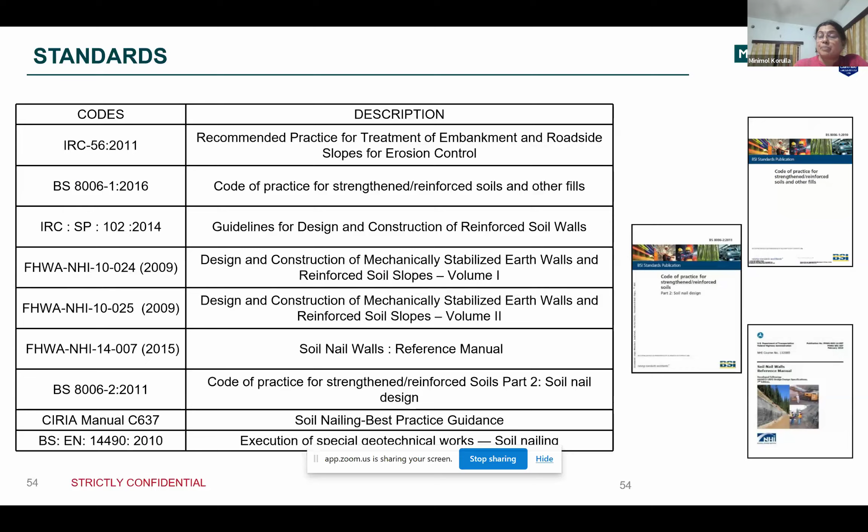In the last 20 years, all these advanced flexible materials have been completely defined by specifications, design methods, how to prepare BOQs, how to calculate forces acting on them, and how to ensure quality conformity at site. All this is well explained in the codes and guidelines.

I'm not going into case references, but there are a lot of structures. The company I work for, Maccaferri itself, has done more than 3,000 structures or projects we were involved in. And it's not only Maccaferri—there are other geosynthetic companies and good companies working in the rockfall sector. So I always suggest, whenever addressing a group of academicians, that the syllabus needs to incorporate knowledge of these types of structures also.

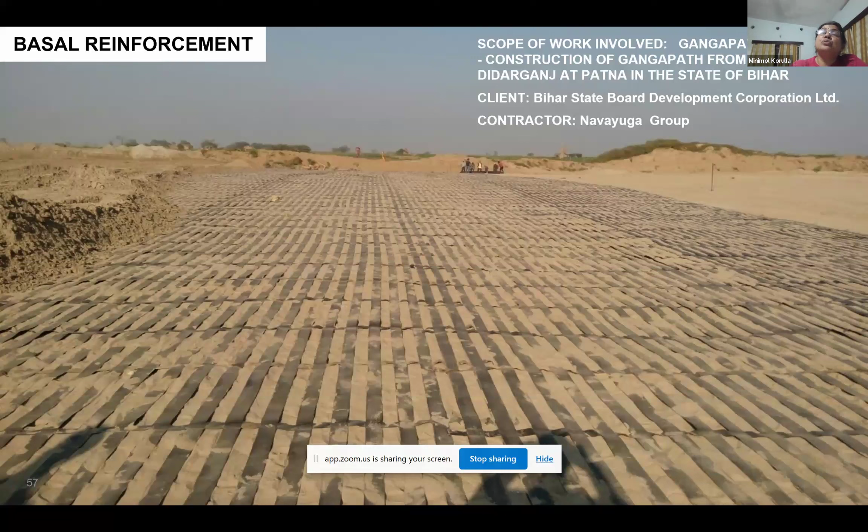Any questions? I know the time is over, but any questions—maybe one or two I can take. Yes, Sharon, madam, participants, any doubts, please unmute and ask. I'm not sure how much time I was just talking and you were not hearing.

Actually, this is online FDP. Some people are maybe working the whole day, and from the workplace they are attending it. So they are very much exhausted and tired, and maybe they are not listening that efficiently. But I have some queries, madam, a little.

Regarding slope stability, do you calculate any rock parameters? For the slope stability, are you asking about the parameters regarding rock mechanics?

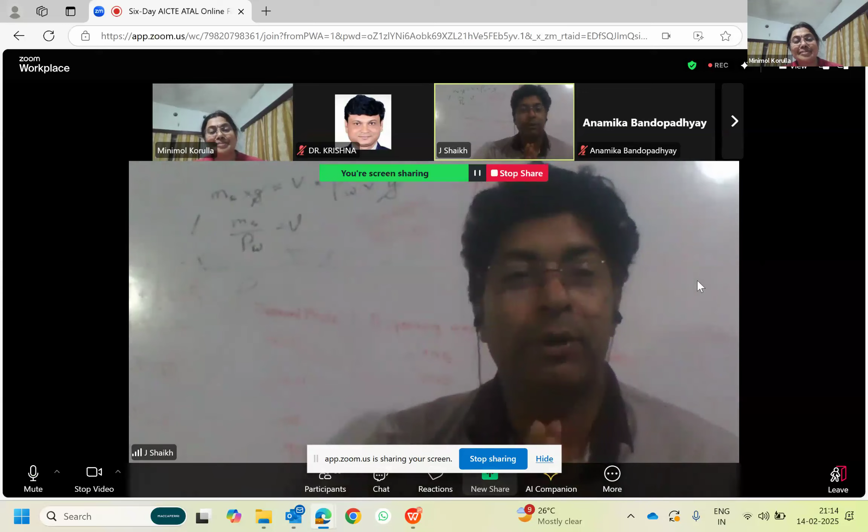Thank you so much. I'm apologizing, I put that Jacob with your name. No problem, I got it from LinkedIn. No, my husband is telling his thanks to you because it is his name. Okay, so I always carry my father's name, Korulla, so he is very happy and told a special thanks to you. But in the industry, I'm known as Minimol Korulla only, nobody knows Minimol Korulla Jacob.

Some LinkedIn it has come, so that is it. But all other people in my family are Jacob only, my son, my daughter, everyone is Jacob. Thank you so much sir, observing that pattern all the time, and in your WhatsApp.